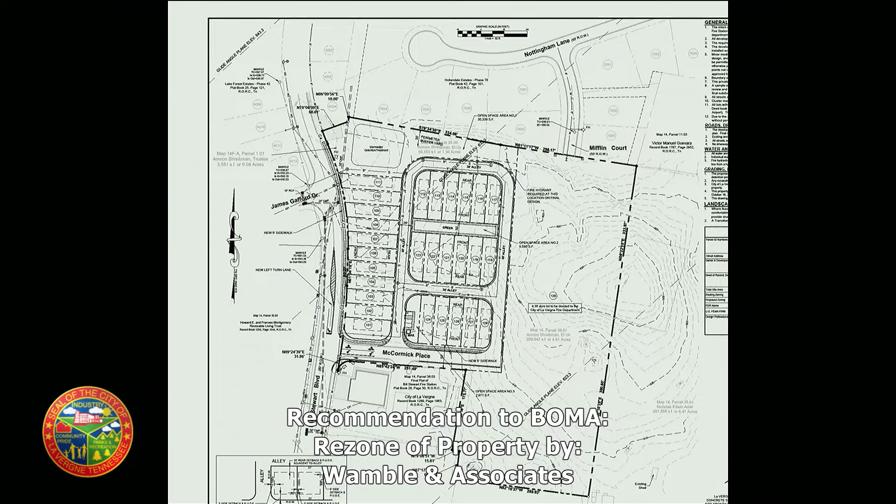So the plan here is on the screen. Let me go ahead and pull up from the workshop. This is the plan that was submitted for the workshop two weeks ago. One of the major differences is you all discussed Hook and Ladder Drive with the applicant. So you'll notice on the resubmittal—I'll switch back—here's the new one. Hook and Ladder Drive is now removed, and that leaves McCormick Place to the south as the main ingress/egress. That was a major change since two weeks ago.

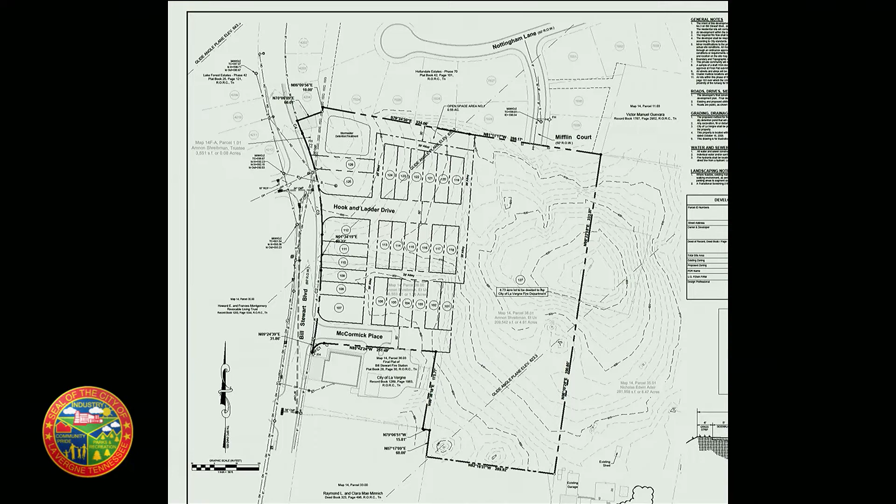Also, some of the planning commissioners had concerns about connecting these streets in the rear, and some of these that were dead end or stub-out streets. Those have been changed so they're all fully connected, as you can see on the new plan submitted tonight. Other changes: they've taken the alleys and widened those. That was a comment from a couple weeks ago.

By the way, in the place of Hook and Ladder Drive, you'll see there's a new lot arrangement. They had extra space there to configure another lot. So what used to be Hook and Ladder, this is now a straight run of lots that goes from south to north up Bill Stewart. Those are some of the major changes. There were a few other comments from the workshop, and those were all addressed.

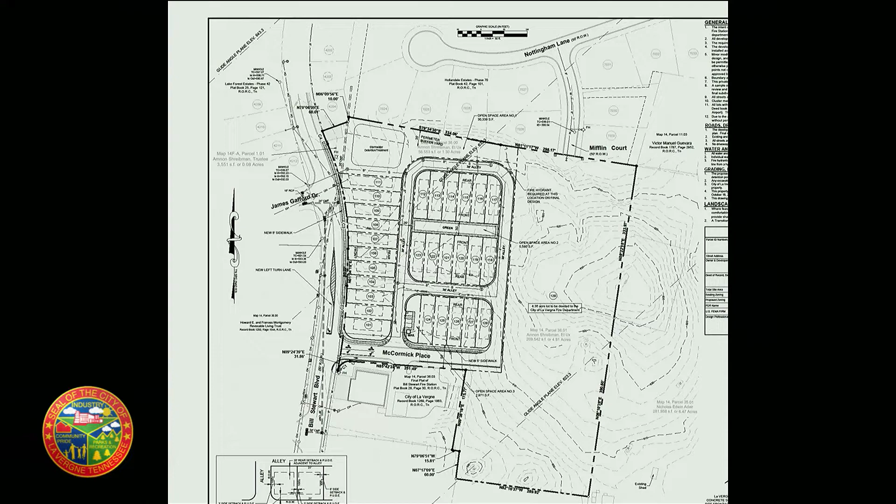Remember, this is 24 proposed lots on 4 acres, and there's the remaining 4 acres which would be given to the city to be used for whatever purpose the city would choose. So you see the existing fire hall there on the plan, right next to McCormick Place.

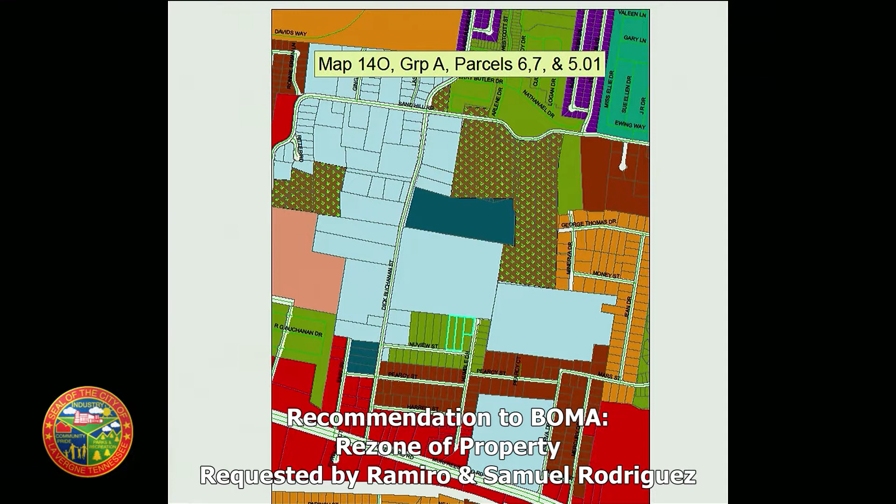You can see some of the gravel drives and parking areas that have been installed there over the last couple years. This is the current zoning map, so you can see it's here in this darker green. It's currently R3. They had requested I2 for a concrete operation.

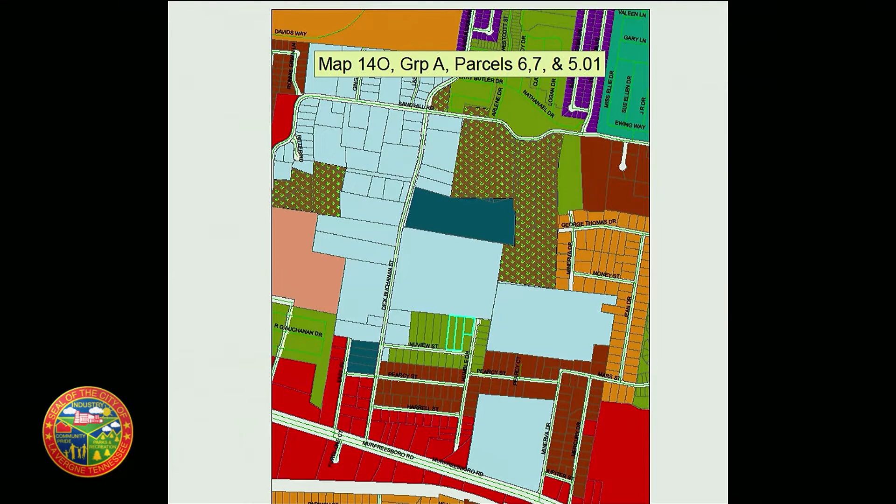The applicants have been here several times, they've deferred several times, and I think the Planning Commission deferred them once or twice, and then they deferred on their own several times. So they're out of deferrals, and after the workshop, it didn't appear that they got the feedback they desired. So I have not heard from them, I do not have a withdrawal letter or email, so they are not officially withdrawn. That's where they stand tonight.

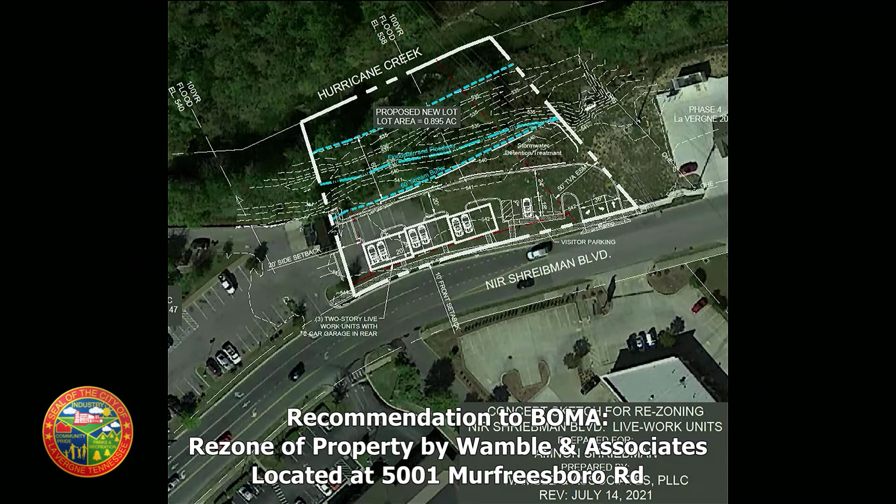So if you look at this plan versus last month, this is the new plan tonight. They've taken these homes and moved them further to the south and west toward KFC, and they've added this driveway, which was part of the discussion 2 weeks ago. So they've moved the ingress, egress, and they've moved the parking places, and they've added garages to these units, which we'll get to.

So it looks like 2-car garages added to each of those. They do have an area of parking on this new plan that has, I think, 5 spaces in this area. So with the 6 garage spaces and those 5, that's 11, which I think is a pickup of 1 from last month, if you count the garages. So they had 10 last month, they have 11 tonight, and of course the ingress egress has been moved up here by the electrical easement.

They've also, you might notice, they were deeper—the units were deeper 2 weeks ago. They've made them less deep and wider to accommodate the garages and allow driveways for the residents to move into the rear and then get their vehicles into the garages through the rear. So that's why they are not as deep as they were.

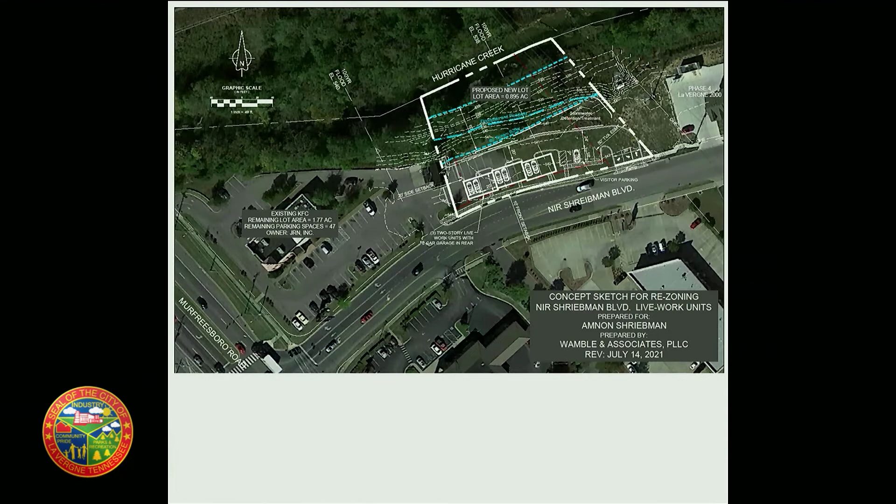And again, this is rezoning, so it's not as heavy on the technical side for engineering and such, so I don't believe Mr. Leach had any comments. So that completes the report. Thanks. Very good, thank you very much sir.

Any questions or comments from the board? Just a question for Ms. Logan. On the front setback, is that going to be in the same parallel as the houses to the right on that location, or is it further toward the road? It appears from here to be closer to the road. Because what I can recall, I think it was 25 feet on the other homes? I believe, if La Vergne 2000—I believe it's 15 feet. Okay, 15 to the front. So they'd have to come back to the BZA for that approval as well then?

Anyway, a couple more questions for the applicant, if I could, Mr. Chairman? Please, sir. Would the applicant be so kind as to come to the podium? State your name and address for the record, please, sir.

I'm Amnon Shriebman, 5047 Murfreesboro Road. I'm the applicant. Thank you very much, sir.

Mr. Chairman, I see we've moved the entranceway towards the other entranceway, which I think is a better idea, keeping away from Kentucky Fried Chicken. How would the impact of moving it back 5 feet impact this design?

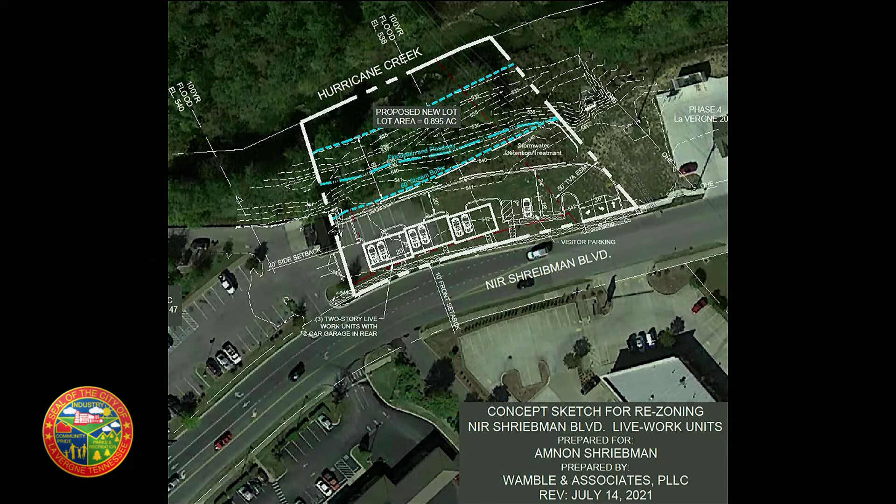Mr. Logan, do you know the little piece that I'm talking about? Can you show the layout and point to that little piece of sidewalk? By the dumpster. There's a little piece of sidewalk that goes off the back of the new pavement to the back of the dumpster. I don't have a problem with it necessarily, I'm just wondering why is it there? Honestly, I don't have a clue. It's not mine, I don't know.

That man may know. Please, sir. There's a sidewalk there already where people were coming to the dumpster, so we just made it so they could share a dumpster if they wanted to. KFC has plenty of room in that dumpster pad for another dumpster if there needs to be one. We just added a sidewalk over there. They could do trash pickup with cans, or they could share the dumpster.

That doesn't fill me with excitement, but other than that, I love the live-work. Any other questions or comments? I do have a couple of questions, and it's really not pertaining to your actual motion, but since you put this out here.

First comment is, the front of that building facing Nir Shriebman, is that where the garage is going to be? Are those going to be just cosmetic walls where you can't see what's behind there, like the garage itself? Will the garage be enclosed, I guess is what I'm asking? Yeah, the garage is going to be closed, the entrance is going to be from the back.

Okay, and then your entranceway, I absolutely love that you moved it down here. I think that's a great plan. I would just love to see you open that up to about 40 foot, to match what we've been doing throughout the rest of the city, what we've asked for everybody else. So just keep that for reference. I think you've got a great plan here.

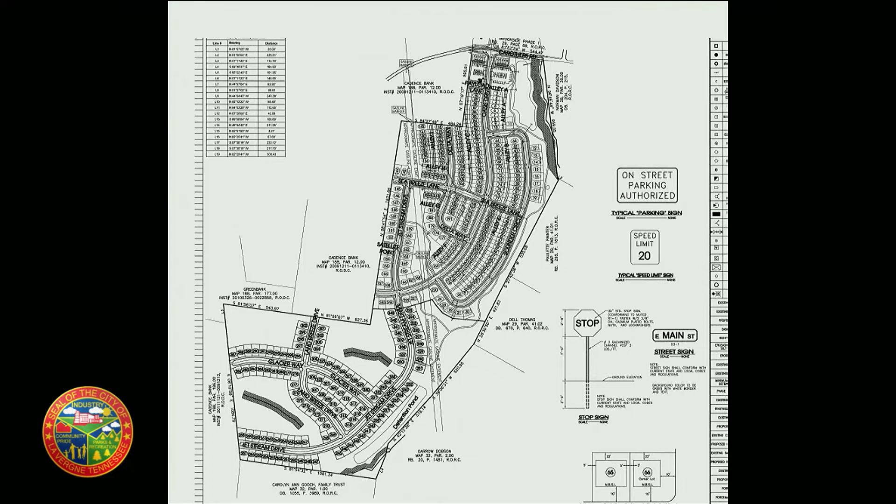So the total lots here for Crothers Crossing when it's completed is about 532, and this is 121 of those 532. You can see the general layout here on the screen, and some of the details that are also included. They do have sidewalks on both sides of the street, and several of you will remember that.

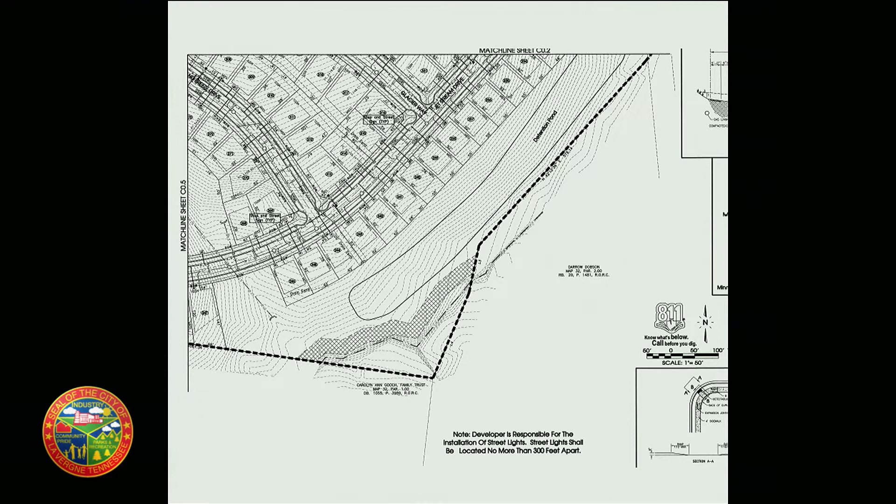When it came in and leading up to the workshop two weeks ago, there were not a lot of staff comments. There were some fire comments, which you see in the report. Other than that, the engineering and planning comments have all been taken care of, so there are none outstanding there.

I don't know if Mr. Leach wants to say anything about the project. You got anything, Mr. Leach? They've addressed all my comments.

Very good. So all of these comments are fire-related? I think they may have tread upon my territory in making some of those, and I did request the fire marshal to look at the plans because I believe several of those were probably corrected when they made them, but I don't clear other people's comments, other people don't clear mine. Absolutely, sir. Do we know if the fire marshal's in the building, sir? Mr. Logan?

Is there an applicant here for this project? If you would state your name and address for the record. Richard Howes, SEC, 850 Middle Tennessee Boulevard, Murfreesboro. Very good, sir. Thank you.

So we have seven comments here from the fire marshal. Have you seen these? I have seen a handful from Mr. Logan's email, and I'd emailed him back asking on a couple of them to clarify a couple things, but I can't say that I've seen all of them.

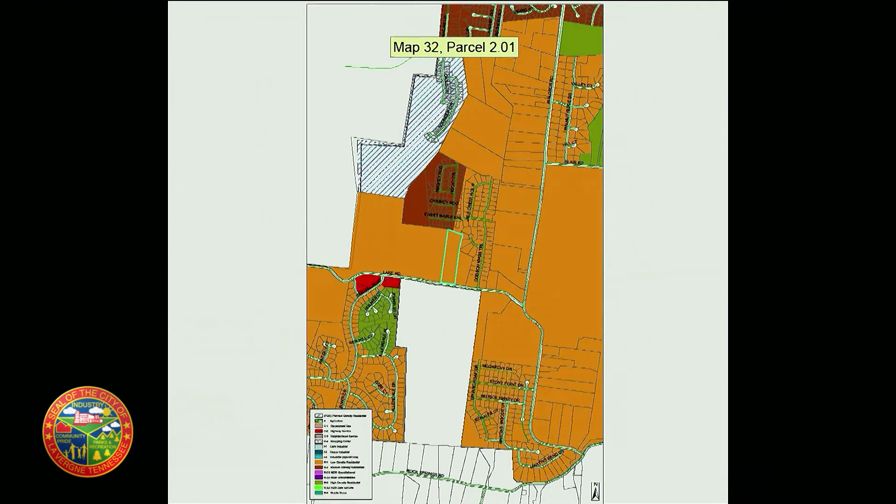So they are requesting to subdivide the 1 lot into 2. The small lot will be toward the front of the property, and the remaining lot would wrap around the back. On this zoning map, this orange color is all R1, primarily low-density residential, with the exception being Phase 2 of the Ridge, 2 and 3, which are zoned R2, medium-density residential.

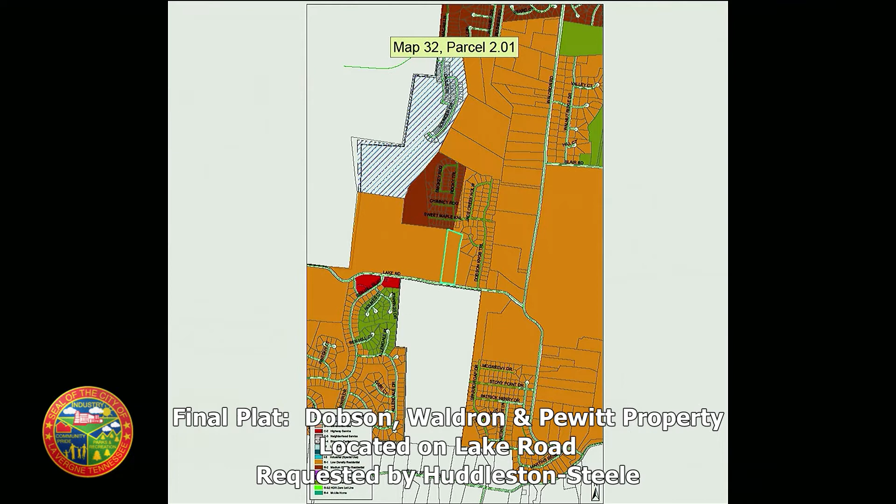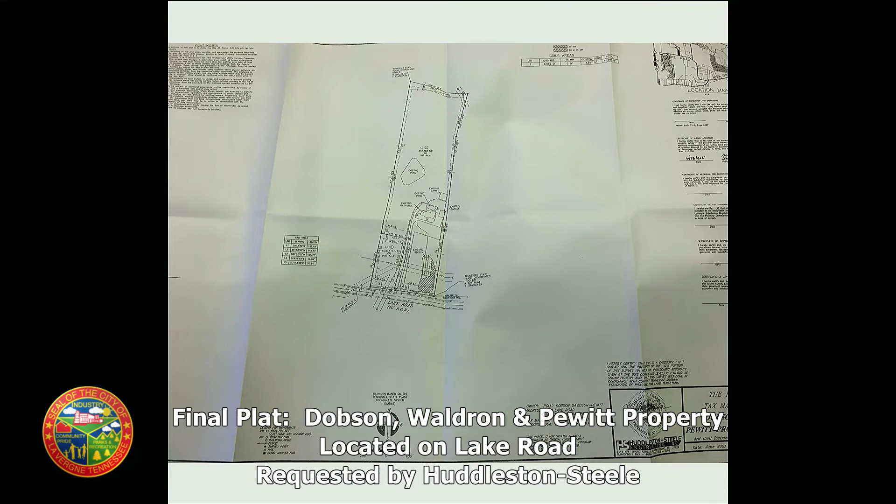Getting to the plat, they did not resubmit the 10 copies until this evening when they came to the meeting, which isn't a big issue because there were really no staff comments to begin with. The only comments were to remove some titles and signature blocks. The front lot will be 0.82 acres, a little over 3/4, and 7.87 acres remaining in the back. This area, SSDS, subsurface disposal system, has been on septic, and I believe they're going to be hooking to the sewer.

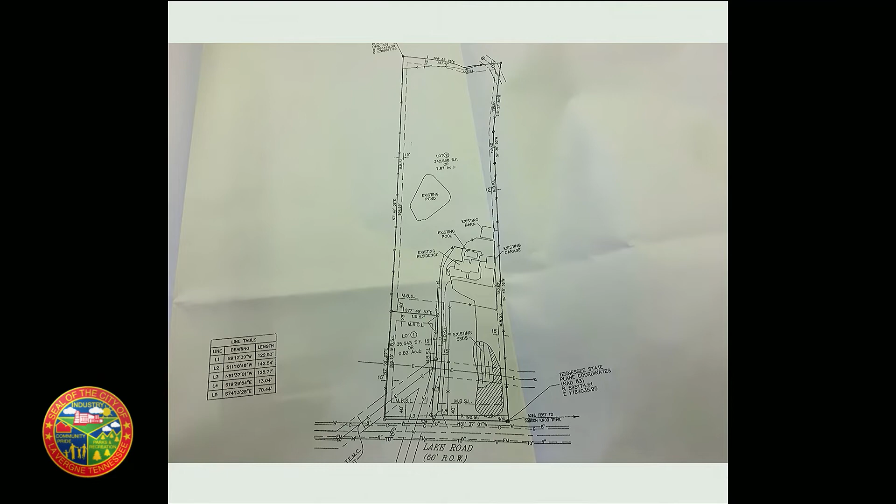Is that correct? The new lot will hook to sewer. The existing lot, from my understanding, was to remain on septic. Okay, and again this is Lake Road to the front, and you can see on your plans they submitted 11 by 17s tonight, which is what you have at each of your places. You can see the existing home and barns, and a pond in the rear, but again this is a minor plat, so it's pretty simple. Thank you very much, Mr. Logan. Do we have any questions or comments from the board?

I had asked in the work session whether the additional public sewer connections could be sufficient for more than just Lot 1, anticipating that a second, third, or fourth lot could be divided at some point. I don't think that's happening, is that right? That's not what's being proposed by the applicant. And two, we typically can't force the extension of additional utilities based on one subdivision, one lot, that type of thing.

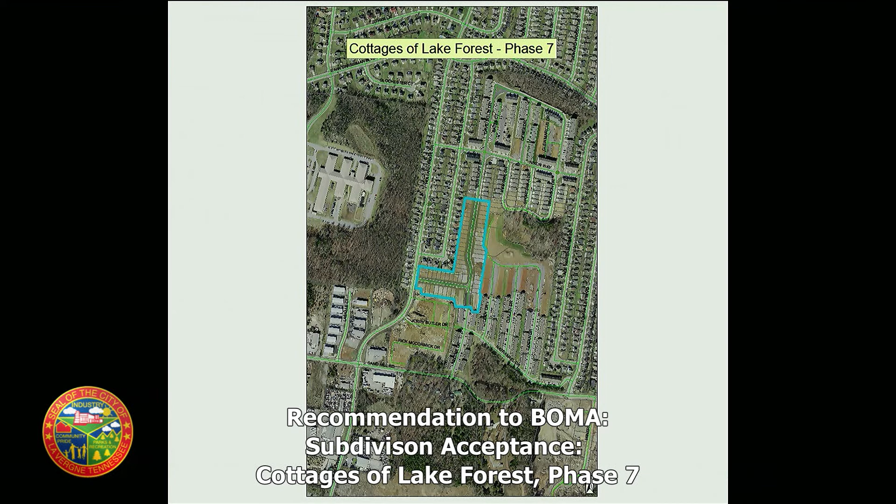Thank you. This is a request for subdivision acceptance at the Cottages of Lake Forest, Phase 7. This property is located off Holland Ridge Road, near Sand Hill Road, the 4-way stop at Dick Buchanan, with Sand Hill and Holland Ridge Road going to the north. As this project develops out, this is the next phase, consisting of 100 attached dwellings, and they are requesting subdivision acceptance.

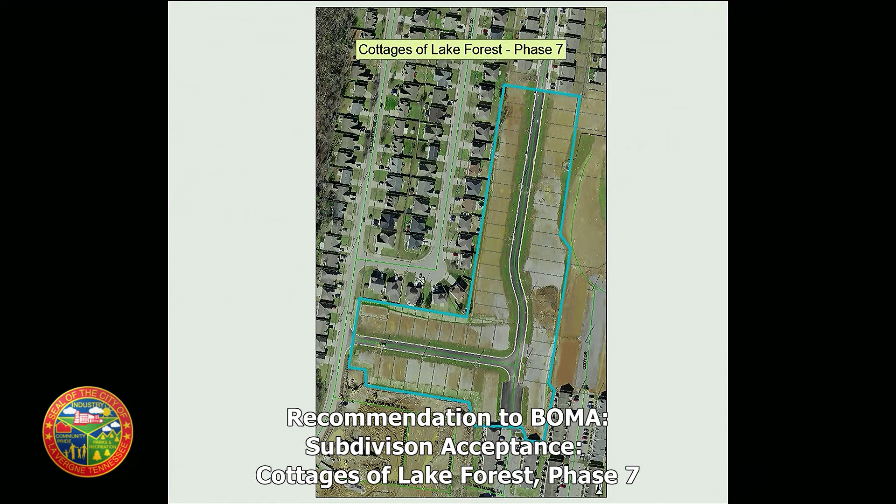A close-up view here shows the area in more detail. Staff's been notified that everything is in order for subdivision acceptance, and so they've been placed on the agenda. Thanks, thank you very much.

So all technical items are taken care of? Punch list good? The punch list is not complete as indicated by the notes. They were provided it, but they have not indicated that they have done everything requested as of yet. They do have a scheduled walkthrough with one of my inspectors on Thursday, but today's Tuesday.

Thank you, Mr. Leach. Questions or comments from the board? I think again it puts us in an awkward position. I think we need to do things correctly, we've been very consistent, and I would just make a recommendation for a deferral. Do we have a motion? That's the motion, so yes. We have a motion for deferral, do we have a second? Second, by Mr. Rutledge. All in favor, say aye. Aye. All opposed? Motion passes.

Our final item, bonds and letter of credit. Mr. Leach? We have one bond that'll be expiring in August, I'll reach out to the developer to renew that. We have two bonds that are kind of pending signatures, we have them in hand, but until they get everything else right, they'll be waiting. But other than that, same as last month. The list is getting shorter, there are not a lot of houses out there right now. Agreed, sir. Thank you, everyone. Meeting adjourned.